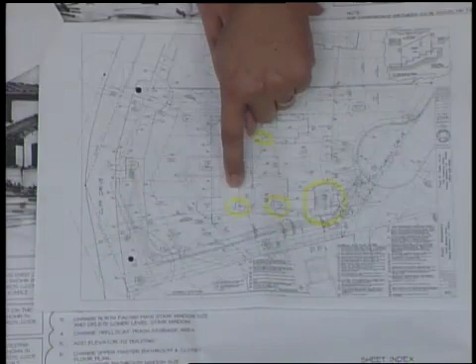The project has been sold to a new person. The person who purchased the house, we're making some changes to customize it for their desires. This is the site plan. The changes: we're changing the trellis at the front, we're adding some skylights, we're adding a fireplace to the back of the building, and we removed a chimney. This is the site plan showing the roof plan.

We met with the neighbors, we discussed them, we did a mock-up out of plywood, and we actually took photographs. This lower area shows the plywood mock-up of the fireplace chimney that's going to be in this deck area. Let me see what this other photo is. Just another side area showing the area in the front where the trellis is going to be changed, modified. And here's another one from the front drive area showing where the garage is going to be located. The changes, moving through.

We deleted one of the windows on the lower level. It was underneath the stair landing configuration. I can show you an elevation, but that's one of the windows we removed. This is the configuration change for the trellis. The trellis before was a little bit smaller, was off-center. This wall, there's no change to the wall except for adding one gate at this location.

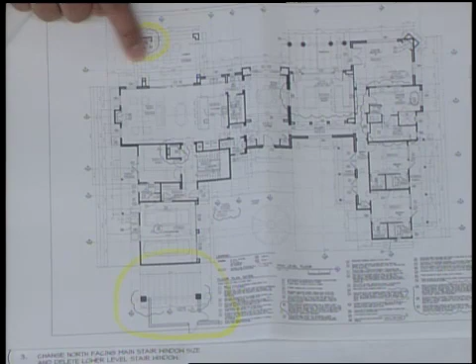Here is the fireplace. It is a wood-burning fireplace on the lower level, and on the upper level it is a ventless fireplace. So on the upper level, all there's going to be is a flue in the back and then this ventless fireplace. On the upper floor, we changed, because we added this elevator, we changed the interior floor plan.

The new owner would like to have a window lined up here in relationship to this area. The window is 18 inches right above the shelf in the master closet. I'll show you an elevation. We moved this window from this area over to here. We changed this window ever so slightly in the shower, and we made this window, we dropped this window, made it slightly larger, and we changed that window in that end.

This is the roof plan once again with the changes that occur in elevation. This is the front elevation showing the change of the trellis at the garage. This is the change that happened for the window. Before we had an arched window. Now this window and the window on the side are completely identical in height.

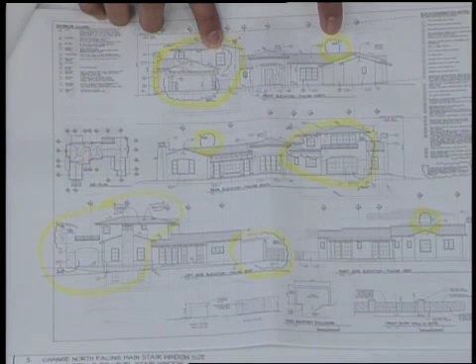I can show you, this is the fireplace that we deleted. These, I told you we made that master shower window slightly different. Here's the chimney. On this end, this is where we added a window. And then this bottom mass increases in width because we had the lower fireplace and then the upper fireplace, and there's one flue and it has a copper cap on the top.

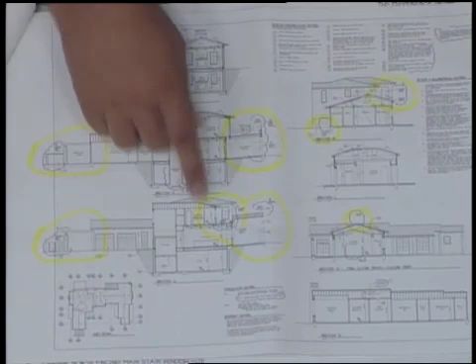This is identical design-wise, just modified the size and the change. No change to the height, just the configuration. More changes here with the chimney, the master shower window, and this fireplace arrangement. More sections going through the different elements. And then the revised window schedule, we actually increased the window area by 26 square feet. So that is the presentation, and that is all the items that are covered.

Anything else? Nope. Okay, does the board have questions? I don't have any questions, Mr. Chair. I just want to feel more comfortable looking at the changes on the elevations on a larger scale.

There also was a letter that was submitted by the adjacent neighbor saying that they reviewed the plans and the changes and they found them to be acceptable. In relationship to... I'm not sure we have that letter. It's in the file. I turned it in when I was at consent. Plus, it was emailed to them. Well, but we haven't seen it, so I guess that was my question. Okay.

So the elevator was accomplished within the existing envelope. Correct. Okay, no questions or comments? I see no major effect of size, bulk, and scale, or exterior changes that are too great, so I can support the project. Same here.

Well, Mr. Lamone, looking for the letter. I just have one question on this fireplace. You're saying the bottom is a wood-burning fireplace? The bottom is a wood-burning fireplace. So how does that fit? It vents right through here.

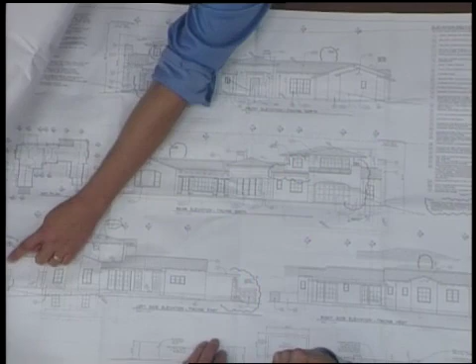So you're at 2 feet and 10 feet and all that with the code? Yep. Okay, so smoke will come out of this thing? Yes. The goal was to keep this in a low profile. I have it at 5 feet. That's a good question. The smoke is 13 feet from this element, which is for the damper element, and then here, this is the 10 foot and 2 feet that you were referring to.

So has that been run by the building department at this point? No, it hasn't, still waiting to. So if that needs to get higher... If it gets higher, hopefully it's not more than 6 inches or so.

Okay, here's the letter. And we do have one letter. Let's see, from John and Sandy. Actually, there's a couple others here. Oh, good, changes. I didn't know about the other ones. Let me make sure the date is 2016 before we read them. Okay, there's one that's August 2014.

This is something about the second design, but it's not. There's no date. And here's one, review after final. This is Schofield and Kaseshian. Correct? Okay.

Property, I mean, let's go over the proposed changes. Okay, so they're the ones closest, on the east of the property. So they're here? That is correct. Okay, thank you. Any other comments or questions?

But what I'd like to show, if you need to see the context photos again, you can look at that. Here is our site plan. We have, again, the grade of La Vista Grande is much higher than the house itself, so you can see from these photos. So the house sits below the road, as you can see from here. These are views taken from across the street at La Vista Grande.

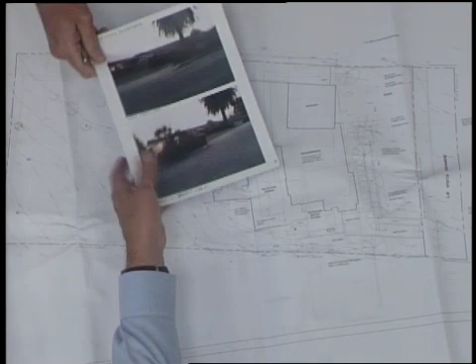So it requires us to drive down into that garage. The garage had to shift to get out of that setback. And in working with the neighbors, predominantly the uphill neighbor who would have been impacted the most, we have reduced our area here and reduced heights. Now, the board didn't ask for this, but this was just in further efforts to try to work with the neighbor. I'd like to show quickly, just visually, how that works.

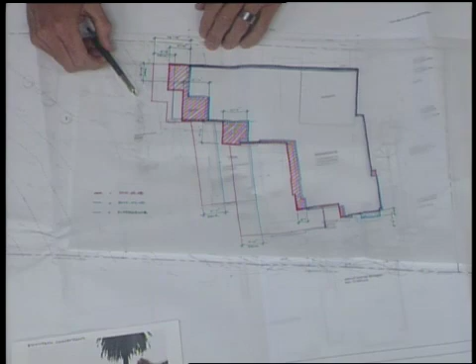But these were all in efforts working with the uphill neighbor. So the green are our differences in number. Our scale structure was 9 feet, overall was 16. And then, it was a minor comment in the board, but we have reduced our deck areas. We've pulled each one back an additional 9 feet. And then these bodies of the house are at 11 feet.

So part of those compromises, pulling it in, quickly where it related to the floor plan, were in this master suite area. We did have an additional bedroom here and stair at the back of this body of the house. We've removed those and put the bedroom on the front of the house, reconfigured stairs. So we've reduced, as part of those compromises, we've pulled in the living room area, we've pulled in the master bedroom area, and that's what's reflected in that overlay drawing.

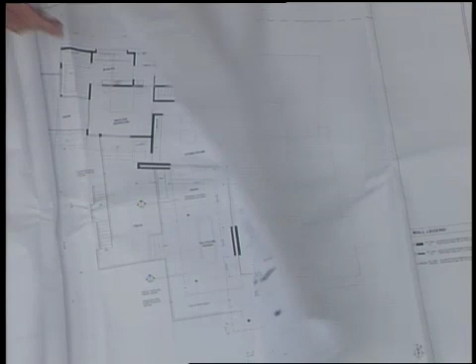So the other thing I'd like to point out, we have basically a walkout basement, so that part is consistent, but we have reduced the area a bit.

Our roof plan, so what we have is a stainless steel metal roof over the body of the house. We have a ballasted roof across the rest. I have those materials to show. One thing about the change in the roof, again, except for pulling things down, this is our higher roof. This roof height, we originally had this overall roof height at 15'6". We've been able, because of the pitch, to reduce it down to 15'3". That puts our lower edge of fascia at 14'4".

Prior, we had it as a flat roof at 15'6". This body of the house came down from 14 feet to 12 feet, and this is La Vista Grande, so this is the part facing the street. We've reduced the height of this body of the house from 13 feet to 11 feet, and then this back edge that was up against the neighbor, again, was further out. We've pulled things in. We had it at 12 feet, and now we're down at 10'10".

We've reduced the overall heights, and again, it's pulled in to help with the view part of that. This roof was 15'6" out further, the additional 9 feet, and that's where we've pulled everything in.

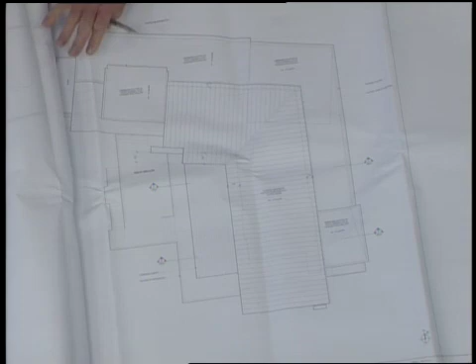But our delta number - we can show on the floor plan better - we're in this area where the canopy came up past the corner edge of the house. Our elevations show that roof area.

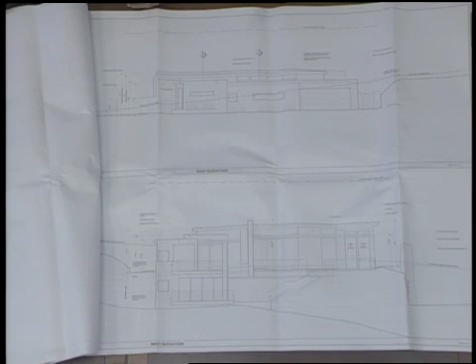So here's our view from La Vista Grande. This dark line is our line of the street, so you can see how the house is nestled into the site. Here's our allowed 30-foot height limit. Just to recap our conversation from before, it's been a while - we were looking at a 2-story house, and that's what was preferred. But in respect of our eastern neighbors, we decided it was better to keep this as a single-story house and extend it down along the site, as opposed to taking it all in the body of the front street elevation.

So here's that extended roof I just mentioned - it keeps this open. Architecturally, I'm doing this because it frames a view out towards the mesa and the edge of the harbor as guests enter the house. Again, we had that before, but it came out to about here, and it was a canopy roof - now we're taking the body of the roof over. So it's an architectural element for framing these views. Again, the garage is pulled in.

This is our view on the west, so our west side. This is that open entry area from the opposite of this. Then we have our canopy roof, sliding glass doors. Here's our master suite and our basement office area below.

So on our north elevation, this was where we worked with a neighbor quite a bit - we did our own story poles with this neighbor in an effort to continue working together and try to reach a compromise. As our compromise, we've pulled this body of the house in, and this edge - this is that master suite behind. But I'd like to show you, since you asked about the sections, how that relates.

This is an enlarged detail to show how that works. Our window area is about 1'8" for the framed rough opening, and on these edges we're using an integral gutter roof, so there won't be a gutter on the La Vista Grande side. We have these details if you need to see more.

So what it starts to look like, or exactly what it looks like - this is the home. As mentioned, to continue working with neighbors, we did story poles with the neighbor to the north. He was part of that process - we allowed him to pick the contractor, and we set these poles so everyone could start to see. Here's our existing home, these are the two poles, and these are our poles at 16 feet.

These are our poles at the back at the heights I mentioned. From that point, we reduced the house, the high point of the roof, down to 15.3, so you can really start to see those two points. You'll see a little extension there - that's just the tape sticking up. Again, the garage had to pull in from where you see here, but because it's lower than the grade of the street, this is how it starts to nestle into that site.

Lane will speak to the landscaping, but we request to kind of soften this front facade further, so we were able to model the trees and bring those in that are on our plan in some of our front landscaping.

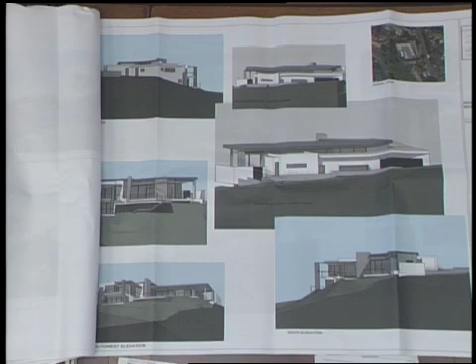So I have brought in an element to ground this end of the house and support that canopy so that the canopy could become thinner and not become a large, bulky item.

I'd like to just show you what we did with those neighbor studies. I have to give the owners credit again for allowing us to go to these efforts to try to work with the neighbors. It's a very nice neighborhood.

You'll hear a lot of comments from people who have a lot of passion for this area. So we had taken a lot of steps to study it, and we knew where we were when we were going into this.

So the owners let me commission an overall topo plan. We did a full topo over the entire area for the immediate neighbors, as you can see. So we did site section studies through this area.

Sorry, I'm covering over your part here. Here's an aerial view of this. This is our site, this is a neighbor to the immediate north. This neighbor has views, and we wanted to study how it could potentially impact him.

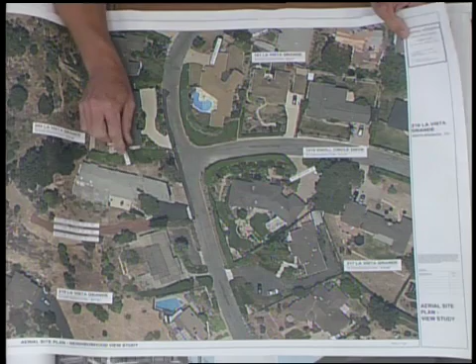And this is our neighbors at 1510 Knoll. So what you're seeing here, I just want to bring these points up: for the neighbor to the north, this is a carport that's accessed off of Vista Grande. This is their home, and this is their outside patio right here.

This home has a master bathroom deck off the bathroom at this corner, and a living area in this part of the house. So I'm just bringing that up so it'll make sense with the photos.

So that immediate neighbor to the north, we were able to do sections through the entire site and really start to study their building pad elevation versus ours, our roof heights.

This represents our reductions from when we were here before. So these are the heights we've pulled down in our compromising. What we did was do a story pole plan with him to understand where we're going. That's just what you saw in that photo.

So again, he's here on the north side of the site. So we outlined all these points, which are so much lower than here.

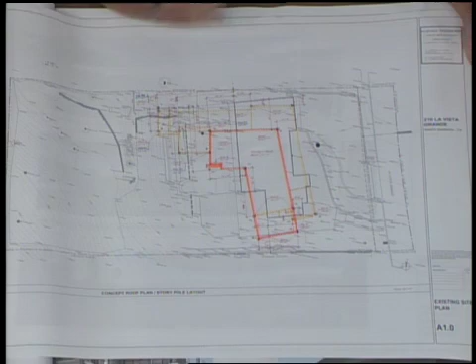So we did the profile that would affect our neighbors at 1510, just to the north. So we outlined these points. Those are our 16-foot that you saw on that photo.

These were at 13, and we were at our 11.6. We reduced those from 11.6 to 10.10. Went from 13 to 12.10. These are the numbers in blue, the points you see on that photo.

So what that looks like from his vantage point. So this—I'm sorry, I'll start here. This is my standing view from outside their dining room. So here are our story poles.

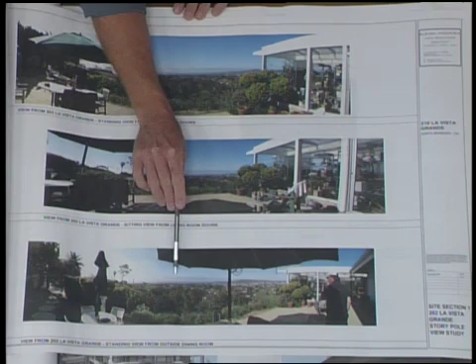Here's our high point across there. This view is taken just outside of his living room. So again, our high point here, and then the edge.

This is the same view sitting—I'm sorry, standing. This was sitting, this was standing. So prior we were out, up to 16 feet further out, 9 feet for the structure out here. So this is where we were making the compromises to pull in, and our story poles are showing that.

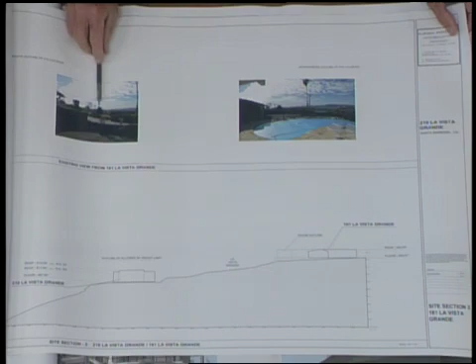Our highest neighbor, we could—this is up and across La Vista Grande. We did those studies prior, and here's that palm tree, and you can see there's our house. We're so far under that, we didn't affect his.

We were lower than where we were with that original photo. So here's our neighbors at 1510 Knoll Circle. This is their home, and this is the existing hedge that you see in the photos, and it shows on the context photos that we have. Here's our project, and again, our reductions from where we were. Now, the board didn't ask for those reductions, but we've made those in the effort of compromise with the neighbors.

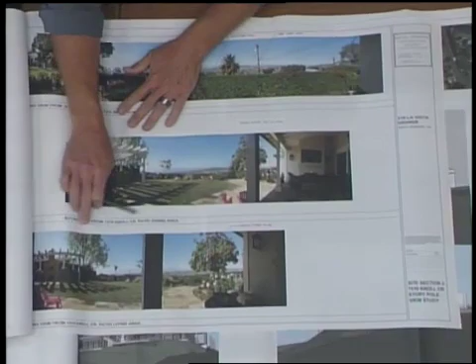This is from the patio area of the neighbor, and they were gracious enough to work with us on this and let us study it from their house. This is the edge of that south story pole. This is our highest point, and the rest of the house is back. There's that palm tree for reference.

From a sitting view from the dining room area, and here's the living room, no poles are in view. I couldn't identify any through here. Standing view from that point, this is that high point of the south story pole. Here are our west story poles.

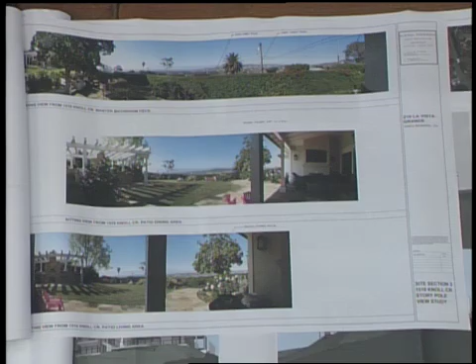So we feel that our efforts have helped, provided a project for the neighborhood, and we didn't go two stories. That was where we would have liked to gone because the views are so nice. But we understand the sensitivity here. So we're keeping that as a single story, and that's what these reflect.

And just want to review a few other items real quick. We did look at lowering the overall grade, to try and look at every option we can. We did study lowering the grade. When we started working out how, the house is lower than the street elevation as you come down.

It put us, if we lowered it one foot, it put the driveway above our recommended 10%. We were almost 12% grade to make that one foot change. It's already tight enough for a car to bottom out. We have to be careful the car doesn't bottom out as it comes up the driveway and out of Vista Grande. And we can't raise the grade because we're working to lower it. So I just wanted to let you know that we did study that as an option as well.

And the question was about colors. Since the house, what we're looking to do is have a standing seam metal roof. It has to be mechanically seamed because of such a low pitch. But we're looking at a sample like this one. And then the ballasted part of the roof would be our Santa Barbara Gold, so it'd be like the crushed rock on top so that we don't have the membrane shown.

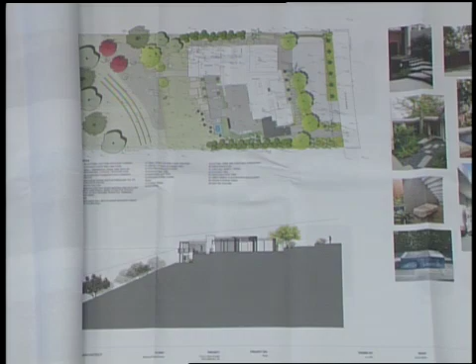Thank you. Anything else?

If I may, there were already a lot of references to the massing of the project. Okay, we're going to get into all of that. We're sorry, we're going to let the board have the questions now, but just to clarify...

On the driveway, so you've moved the curb cut opening down. That allowed you to get this lower because it's going downhill, correct? And your grading effort is to get this point as low as you can in terms of getting this to be 10% or less from here to there, correct? Correct. Okay, so if you move that curb cut anywhere else, if you moved it further up, then the slope drops dramatically and you have a bigger challenge to get to 10% to get this lower, correct?

Correct. Okay, what's the scale on this thing, 1/8 of an inch? You had the possibility to move it - let's see, you have a 10-foot setback as I understand it - so you could have moved it another 6 feet to the south, but based on your numbers here, that isn't going to get this to drop much further, maybe another 6 inches at most. That's correct. And then our walkway becomes the driveway, which we try to avoid. Okay, so you've moved it as far as you can to get the slope to work. If you had your garage over here, it wouldn't work because you'd have to be higher, correct?

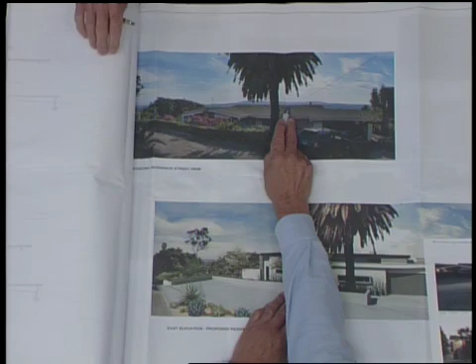Let's see, I want to go to that photograph. Here it is. And you had actually a bigger photograph of that. That's right, okay. So the ridge height currently for this existing roof, you know what that is? That point right there? Yes, sir.

We had it measured. 508.92. Should have brought a calculator. 508.92. What is your finished floor existing? 497.5. I'm sorry, 497.05, 05, not 0.5. Okay, so 497 finished floor now, and the top of that ridge is 508.

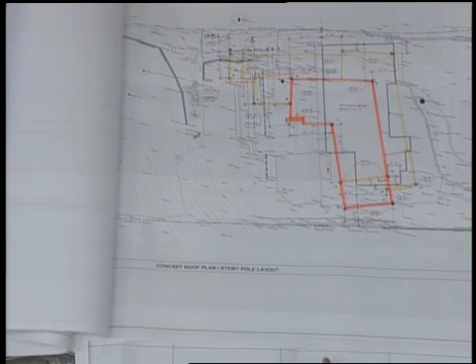So who has a calculator real quick? Brian, you got one there? Yeah, so it's 508.92 minus 497.05 - Chair, I'm sorry, that was the lower part of that ridge, the high ridge is 509.11. 509.11 minus 497.05 equals 12 feet. Okay, so the current house is roughly 12 feet high from where its finished floor is today.

Okay, so your new roof ridge line height, the one you've shown on this section over here, that point right there, what is that? 15 feet 3 inches. So 15 foot 3 or 3 inches? 15'3". So you're roughly 3 feet higher. Okay, and you're well below the 17 feet 6 inches that's required for a single-family home anywhere else in the city. That's what we're allowed.

30 feet - well, you're allowed 30 feet, but for design review, yes. For design review, anywhere else in the city, a single-story house can go up to 17 feet 6 inches without anybody looking at it. Okay, so I just want to make sure everyone clearly understands, so we've got a roof height that's 3 feet more than it is today. Is that what you're telling me?

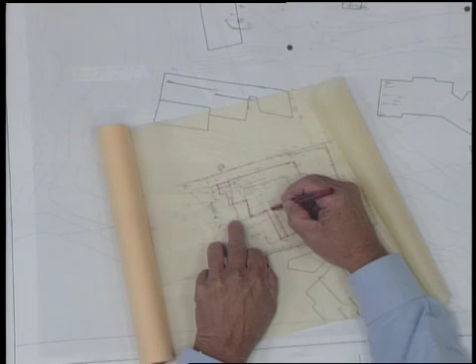Okay, so we're roughly talking about a footprint that's that big for a single-story house. Now I'm going to compare that to that single-story house across the way. That's the garage, carport? Carport. That's a deck, or is that part of the house? This is an enclosed area, that's part of the house. It's like a large trellis piece of the house. But let's just assume the house is this big.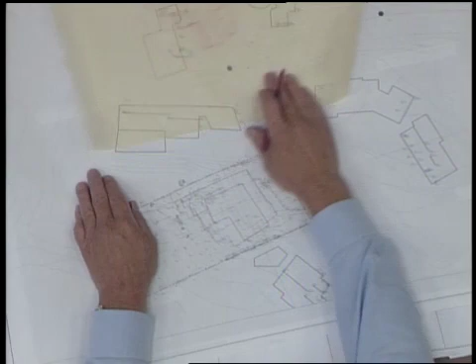Okay, so that's compared to that house, compared to that house, compared to this house.

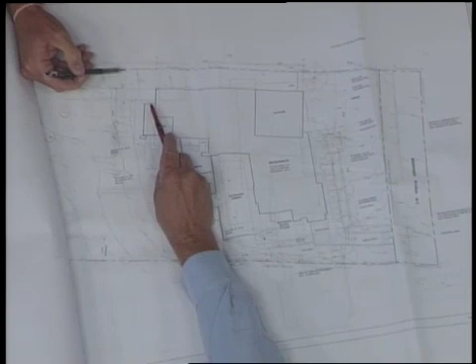And the deck distance on this side, let's go back to your new drawings. You're now greater than the 15 feet that we require as a guideline, so you're at 17.3 over there.

Okay. And on the walls that you're talking about, you had mentioned walls over here and over there. You said they may be in bad shape. I wasn't able to actually walk onto the site, my views are only taken from what I can see walking along the street, so I really couldn't see those walls. What are they made of?

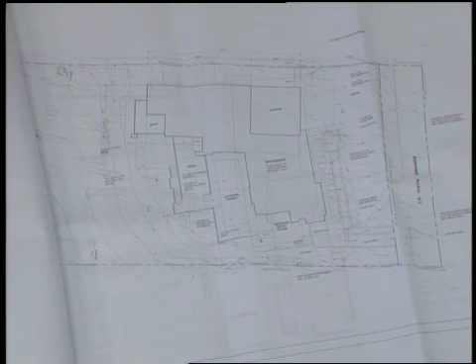So where we say the area of wall to be replaced on the site plan, there's a full stone retaining wall. It steps back. There was a concrete post with concrete infill panel, those built-in 4-inch panels. That's what you're seeing on this part of the survey plan. This is what we need to replace because this portion is just showing buckling. So what would you intend to replace it with?

What we're looking to do is a full retaining wall for this portion that would be either block or concrete that would be faced with stucco or brick or whatever. Stucco stone could be a potential.

And do you have the same condition on that side? No, sir, this one, we're looking to push this retaining wall over, but this wall's existing.

Okay, and then I want to go back and look at your elevations very quickly, so I understand what you're doing with the front entry there. And here I see a column, would I actually see that column looking through there? Would there actually be a column? That's it right there. Okay, so it's on the skew. Exactly. Okay, this drawing is squared. Right, okay, so because it's squared to your front elevation, and then where you were talking about the clerestory above the kitchen and dining.

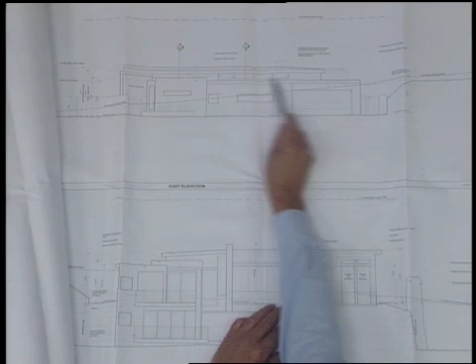So kitchen is here and dining's there. Dining is here. Oh, here. Kitchen is this. So this is the only high window you have facing, because I think previously you had windows all the way along here. That's right, we've reduced the area of those windows.

Okay, now this was the La Vista Grande side. Right, that's towards the street. Okay, and then over here, where's the floor line? This is the master bedroom. So this floor level here, basically like that. Okay, so that's kind of the floor line there.

Okay, so that's here, so if I have a 6-foot person, okay, and that's a 6-foot person, okay, so the way I read this, the way you've drawn, is this above the bed, the headboard? This is a bathroom, the master suite bathroom. Oh okay, I'm sorry, so this is above the vanity. The lavs are here. The lavs are below that? We're not looking for that to be clear glass.

And what are you thinking that'll be? Frosted, because we want privacy, we just want the daylight. And this one is in the closet? No, this is the laundry room. That's the laundry, okay?

And then I guess my final question, you showed us colors of the roof, but in general, what are you thinking about the colors of the house?

So the colors of the house, we're looking at an off-white, much like it's rendered here. There was a comment that she didn't want white in the house, but because the predominant view is down on this house, the east side's not getting a reflective quality off the sun, so we feel it's still appropriate to keep it as a white, off-white color on the face.

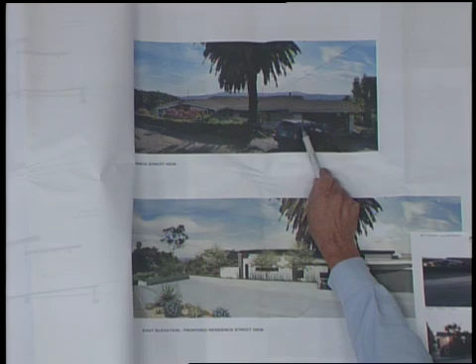Okay. Let's see. Do we have other questions? No. Okay, before we go to comments, I want to address the issue of story poles.

You chose to go out and do your own story poles, correct? With the neighbor, correct. And you chose to because you were concerned about the neighbor, but apparently the rest of the neighbors didn't know that. Well, they did, and it was addressed in the owner's letter.

So here is the challenge with story poles. This board has the purview to request story poles, and we can request them at three different levels. A full level is typically required on a new site where there's no building at all, because it requires the grade level, story pole, and so forth—it's a much more complicated process. We also have a standard level that gets a bit more detailed, and a basic level that just gets to the heights of those things.

But when we ask for those, they're to be put up in a certain time frame and remain there for a certain period so the neighbors are able to look at it. So under our purview, there's a process you go through. You chose as a private owner and designer to do it on your own, so there was no review or oversight by this board or city staff. I want to make sure people understand that—it was done by the owner and the architect working with their adjacent neighbor, not under the purview of this board. If it were, we have certain requirements and regulations.

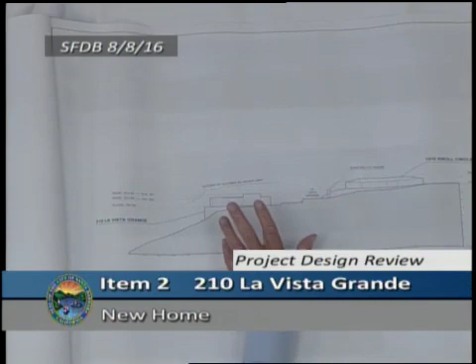One of the things that we did ask for is this study through sections, and thank you for doing that, because it really does help us understand where this house sits in relationship to the other houses. That's why I was asking about the finished floors and the roof heights, and we're only really talking about a 3-foot differential.

If you had another—where did those little computer-generated perspectives go? Oh, they're on the main plan. Oh, they're on this side. Okay, yeah.

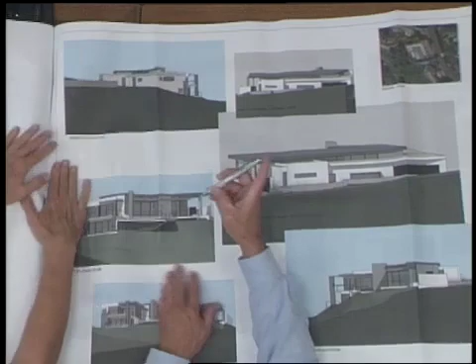So I want to talk about size, scale, and bulk. One of the things we talk about when we talk about scale, I would encourage you when you do these sketches to include people, because that's a 6-foot high person compared to where you are.

This being, I think you said 15 feet to here. So if that's 6, another 9 from here to here, and you're looking at it in perspective. That's what we talk about when we deal with scale. Scale is in relationship to the human person, and we look at that very carefully.

So when someone looks at this without people there, they can conjure up all kinds of images of commercial buildings you may have seen that look much bigger. You can think about banks and schools and some other buildings. So that's what we talk about with scale.

When we talk about bulk, we talk about that form right there. And is that form different than some of the adjoining homes? That's where I start to look at the footprint. That's why I did that little exercise a few minutes ago on this piece of tracing paper. Does the bulk of the house start to get bigger than the adjacent neighbors?

So when we talk about size, scale, and bulk, that's what we're dealing with. When we talk about size, that's where we get into the issue of the FAR. That's why the city council, when they had this board come into play, gave us the tool of using the FAR. Our guidelines really have us look at things that preferably are always below 85%.

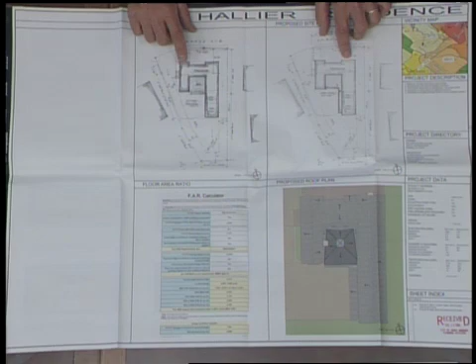And here's the roof plan. This is the street side of the house, so all of the additional space is behind the house, and the grade drops behind the house. So this is a two-story addition, but from the street there's very little difference. I've now added for the staff an existing and proposed plan. The cross-hatched areas here are the infills. So it's a two-story addition in the center of the courtyard, and then a small addition to give the garage some depth. That's a one-story addition.

And the elevations, I've done 4 elevations more accurately, partly in order to understand the definition of cellar and the grade on the exterior. This is the main section through the building. Here's the other section that you asked for, and I'm sorry I didn't supply it with these drawings. The only change from the street is this little piece of skylight which shows over the house, and I'm changing that from a window to a door. So essentially, that's what you see from the street now, and that's what you'll see afterwards.

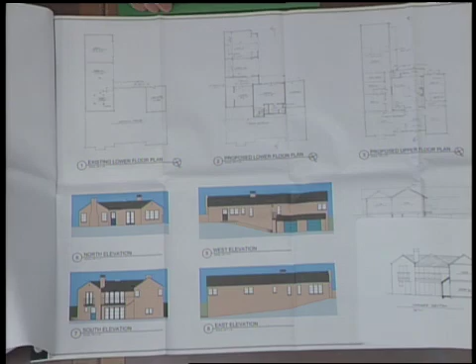Okay, and I think that is everything you asked for. Okay, and you had the roof plan on the other sheet. Right. Okay.

Before we go to public comment, Mr. Lamone, is there any staff comment? Just want to clarify. So you say that it qualifies as a cellar, and therefore half of that square footage does not count toward the 50% rule now? Right. I did a whole exhibit for Caitlin on that.

Okay. Is there anyone in the public wishing to address this project? Mr. Lamone, did we get any communication? Doesn't look like it. Okay. Then the chair will close public comment and bring it back to the board for questions.

Do we have questions? It's just plaster siding, right? Yes. Just it will match. All the materials will match. And the existing garage doors are just panel doors? There's a photo of them there. We're going to try to reuse them. They are painted the same blue as the garage doors open. Oh, are they? Yeah, sorry, they are painted the blue that matches the lower doors in the picture. And they are paneled. I think they might have a top row of glass. I'm not sure. Any other questions? No? Okay, let's go to comments.

I'm assuming you're requesting project design approval. Correct. Can I see the minutes again? Sorry. Yes, right here. Thank you. Okay, comments?

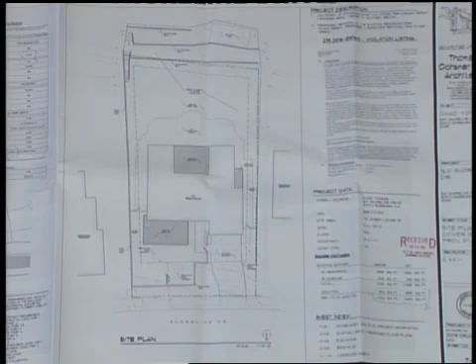Yes, so just clarification off the top, the project description is slightly increased. The size of the addition is 853 versus 591, and the FAR goes to 65% instead of 60. Can I clarify why that happened? It was partially an error by the plans when they were originally submitted, and the floor plan basically accounted for that, but when I reviewed it this morning, I noticed that the square footages were wrong. I submitted these plans with a blue form this morning.

I wasn't aware of that, but okay. We don't notice projects and then change the size of the project. Oh, okay, that's sort of a switch.

Yeah, it was the same project, really the same project, but the numbers were not correct. That's a big problem. We don't notice projects that have wrong numbers. So I'm just going to caution the board that they have the choice to either renotice it or give you some preliminary direction, because I don't like to have a project that doesn't convey the accurate project.

Let me ask you one other question. Because this is here for comments only, it has to go to the Planning Commission, probably because of a development permit on a bluff. So today we can't do anything more than give it comments.

When it returns, does it get noticed again? No, not typically, but I would recommend we do that. So part of our motion could be renoticing, correct? And to limit the direction today, because it's unfair without a proper notice to give comments on direction to change the project, unless you reduce the size to what was noticed.

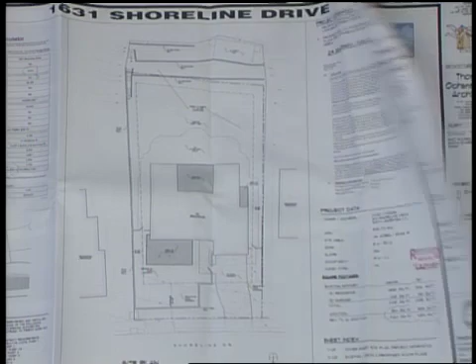So the existing house is a bit unfortunate. It's really odd. It's got a 10'8" plate with a 3 and 12 pitch, and the windows are at 6'8", and it's just a box. So it's really a challenge to do something with it without completely taking it down.

So the concept is to really try to create some new roof forms and extend the roof down with some eyebrows around the perimeter. Have you done any mold abatement for the building? Have they talked about it? It just kind of looks like there's something going on. Yeah, let's wait till we get the questions. Sorry, there's a lot going on.

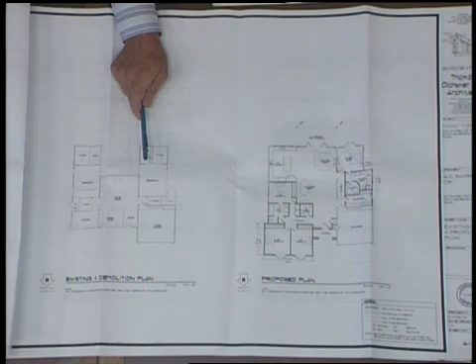So we're really going to go through and reorganize the whole interior, new windows, and it's basically going to be gutted. This is the demolition plan, which we've established maintaining the perimeter footprint and keeping the existing roof structure. There's a 10'8" ceiling throughout, so we've got some nice volume. The challenge becomes, what do you do to turn it into something that improves on it?

So the proposed floor plan extends 2 bedrooms out off the front side, and it encloses that interior space and turns it into a living room, and really reorganizes the floor plan and puts a master bedroom on that southwest side.

So in terms of the forms, we've got the existing elevations here on the left side, and as you can see, there's a 3 and 12 pitch roof. The concept was to find an architectural style that we could extend the roof eaves forward and bring it down to a human scale. What we did was kept the ridge - I've got a roof plan that shows we kept the ridge across the center portion of the structure - and added some higher pitched gables, as well as reframed the garage low pitch, actually reframed that to a steeper pitched gable, and then extended the eaves down with a heavy timber feel that allows us to get them projected out beyond the existing facade.

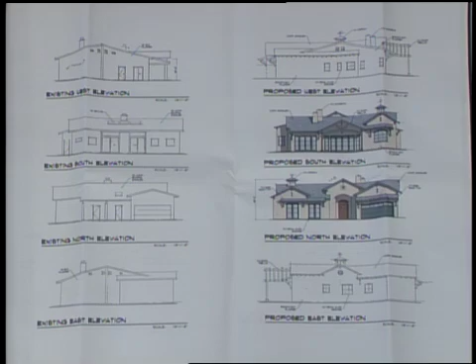Good fix. So the roof plan on the next page kind of gives better clarification on the concept.

So the ridge would stay the same. There's actually these skylights on the south side which would stay, but basically the plate throughout the entire roof would stay. It's actually 12-inch ceiling joists that just run all the way across, so the top of those would actually be up around 11 and change.

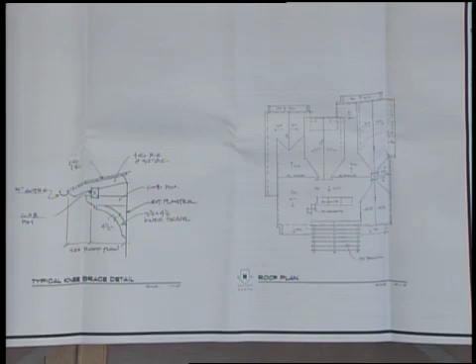But so the idea was to add an entry gable, reframe the garage gable, and then a gable over the bedrooms. And on the back side, keep the pitch and turn it into an eyebrow, and then add a small gable over the kitchen. This would be an early sketch of what the detailing would be in terms of the heavy timber and the eyebrows that would help bring down that roof extension around the perimeter of the building. So with that, Chuck, you want to get into your...

You can stay there, it's okay. Speak into the microphone because it's being recorded.

Some of the exterior zoning violations were these retaining walls in the back that were never permitted. Adam Simmons, a hydrologist and geologist who's advised us on the concept, finds these walls to be in very nice shape. It's a 6-inch concrete caisson that goes down into very solid material, and these walls are not angling, sloping, or failing even 1%. He thinks they're very viable and solid, and recommends they stay in place because keeping them would add to the stability of the bluff.

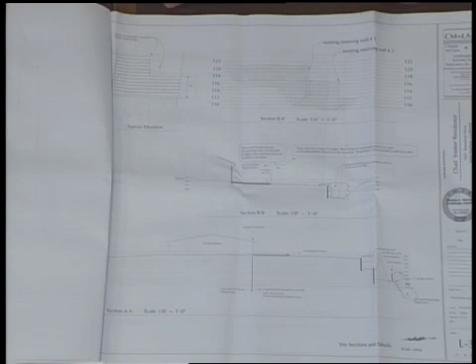There are also 3 drains that currently exist on the property that take water from this lower terrace down to the beach, and he's recommended that we remove those. He's also recommended we remove this concrete pad, and then all of the water that hits the roof is directed out to the front and treated per the stormwater program. Any water that lands in the back is allowed to soak in, and then migrate down and sheet flow over the bluff. No more concentrated flows.

Out front, there's an existing double entrance driveway, and we're going to remove one of those so it'll just be a traditional driveway in. There's a nice horizontal hardwood fence that's going to be installed on both sides, and that'll also come across the front to give a little bit of privacy. We're removing one bad tree out front that's in the 20-foot setback, so we've got an application in with the arborist on that.

There's a detail of the fence that you'll see from the front, so it's 1 by 6 boards horizontal. And then we go on to irrigate it and plant it. A couple of new trees out front, and the rest is existing landscape to remain.

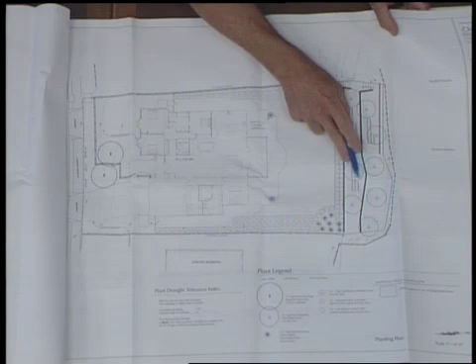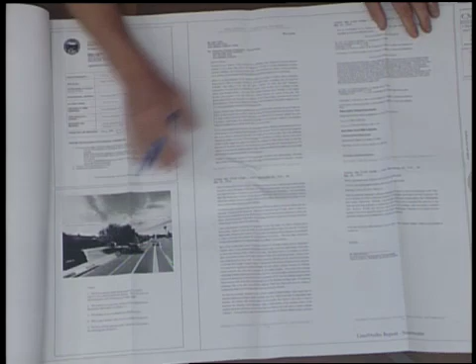We've got some lemonade berry that's going to fill in these terraces to pin those terraces down. We have actual permeable paving to absorb the stormwater. This is our tree removal application, and this is Adam Simmons' geologic report. And then we have the survey.

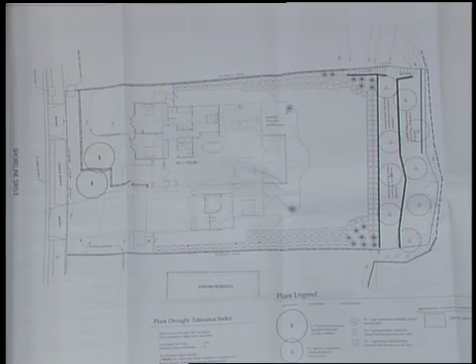Okay, let's see. I think that was my questions. Other questions? Yes, for Chuck too.

So in front of that fence, you are planting some plantings back in front of there, and the driveway cut - is that just staying, or are you going to remove the sidewalk?

Okay, yeah, we'll come back with the revised front landscape. Other questions? Yeah, one more.

And so I see this line here that looks like a patio edge. Then what's in here? That's a piece of drought-tolerant lawn. Oh, I see, okay, I didn't see a hatch. It's that verde - oh, buffalo grass. The owner's keen on that.

We're, so I was just curious, since you're on the bluff, there's usually a line that shows the... Oh, that's right, the 75 setback, and 50. You're right, yeah. Your office mentioned that to me, and so far it's not on the plan. We'll get it on there.

Because I don't know, wherever that is, you're probably not going to be able to add a lot of water up here to the top of that bluff to keep that buffalo grass alive. That's an awful lot of buffalo grass. Adam Simmons said that everything else you're proposing, he's with, and he's kind of the guru, it would seem. Okay, so I'm not sure how to respond to that. He didn't have a reaction to the lawn amount.

Okay, other questions? Okay, let's go to comments. Yeah, Mr. Chair, I only have one comment.

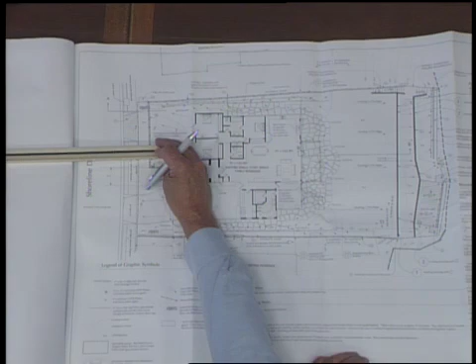Part of the problem we have along Shoreline Drive is everybody wants to be Montecito, and they all want to have big hedges or big fences right on the front, and I just don't think that behooves the neighborhood correctly. I think under the rules, you can get this back 10 feet, and then you are outside of that 42-inch restriction, I think. So that's only another 4 feet. So that's something you might explore.

The other thing is the disconnect - and I know everybody's doing them because I see them all over the place - is the horizontal boards on the fence. And that kind of connotes to me a very contemporary approach to the design, and it doesn't, in my view, jive with what is being shown on this sketch. So I think a fence design that's more compatible with the design approach of the architecture is probably going to be a little bit more palatable.

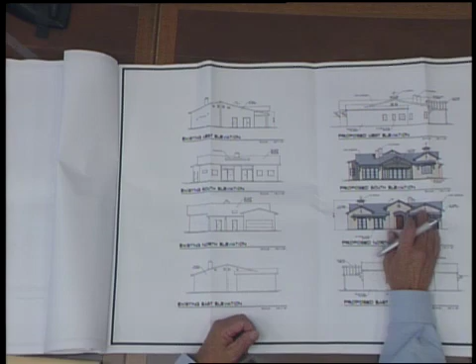I agree, just to interrupt, I was working on this for the owner, and then Tom got involved. I understand how it goes. So I'm just saying you need to kind of get that coordinated. And then I, as my landscape colleagues will all be interested to see how you're really going to landscape the front and what's going to happen there now, because I think landscaping will also help your architectural scaling issue.

What goes in front of this house and where it sits in relationship to the face of the house, and how you set that up as the landscaping leaves, the composition of landscaping as it leaves from the curb back to the face of the house. I think it would be important for you to really understand what's happening on each side, the homes on each side, in terms of landscaping. Because on that portion of Shoreline Drive, it's a very wide boulevard, and that goes to your backing out issue for automobiles, but it also presents a different scale on Shoreline Drive than further down when the road narrows. So paying attention to that landscape composition is probably pretty important, maybe even more important than the architectural approach.

So that's my overall comments. Any other comments? Yes.

I have some. I'd be in agreement with the chair of the board about taking this fence back. It's just way too close to the sidewalk to be that high, and the change in style would also be really good. And I'm going to be curious to see, are these doors coming out the front there? So what's your paving going to look like? That all needs to get tightened up. And the plantings and placement of trees is going to be really critical in front of this house, and species too.

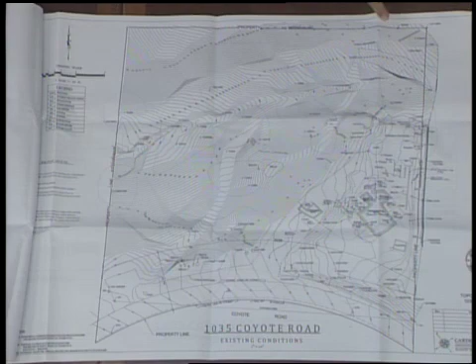But to bring it up to conformity, we meet the parking requirements - we're having to add a two-car carport. Because of the constraints of the topography of the property, you can see the flat area - it's 0.6 of an acre, so it's a very small area of a building pad for the home and also the carport. On the first page, the site plan, you can see where we're proposing to put the carport.

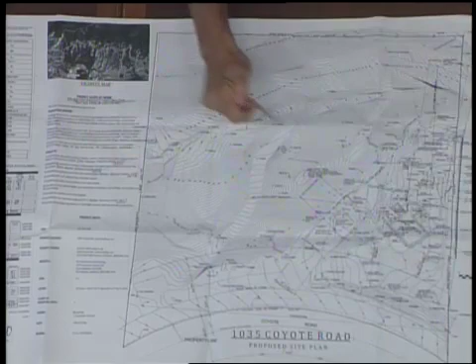We're going to actually remove the accessory building and place the carport in pretty much the same location that the accessory building is, and convert the workshop into a residence.

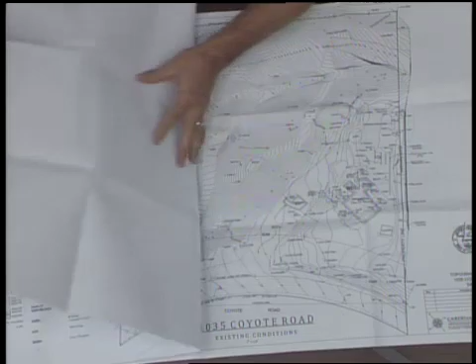Wow. Do you have elevations? We're not changing anything on the existing residence - it's got a very whimsical Hobbit house feel, which we like, so we're going to keep that as is. As you can see, it's got a little kitchenette in it and a bathroom.

So we're hoping it's not going to be - we're going to be dealing with some building department issues, converted to residence. But, so just to be clear,

So basically, from where you are today, you're not adding any other square footage? No. Okay, anything else that you want to share with us?

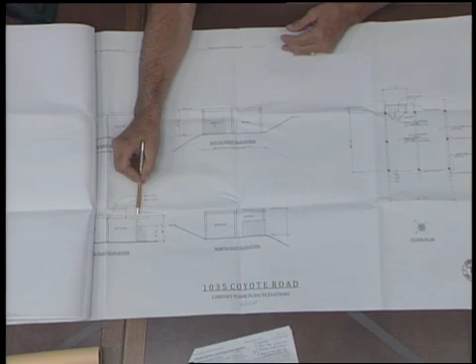Well, the carport - we don't have to do it, but to meet the parking requirements. I'm trying to minimize the structure. I'd like to not even see it from the street, so that's the reason for the flat roof, which the residence also has, so we're mimicking the flat roof of the house and adding a few details. This outrigger detail is a reflection of what they have on the house too. I'm sloping the roof away from the street so you won't see the flat roof from the street, and I'd also like to see vines grow on these columns and eventually cover the whole structure to make it just go away.

Okay. Anything else? That's it. Okay, all right.

Staff, do they need to know anything at this point? No. Okay, what I would like to mention, I noticed that there's no action here. We've been through a full DART process, staff's thoroughly reviewed this project, so I'm just wondering why we're not having action today.

Well, because you have to get a modification. As I understand it, you've got to go in front of the staff hearing officer for modification. Can you elaborate, Mr. Lamone? That's correct - you cannot get an approval. All you can get is positive comments that would help you in achieving modification approval. Okay.

So I want to come back to that in a moment, but is there anyone in the public wishing to address this project? Mr. Lamone, did we get any public comment? No, we did not on this project. The chair will then close public comment and bring it back to questions.

I want to go to questions first, just to clarify. The project description talks about the fact that, the way I read this, the existing footprint of one of these structures sits within the 35-foot setback. So could you clarify that? You can see the setback here. Okay, so this is the setback line. That's right, and this is the right-of-way line. Okay, so that's the road right-of-way, and that's the 35.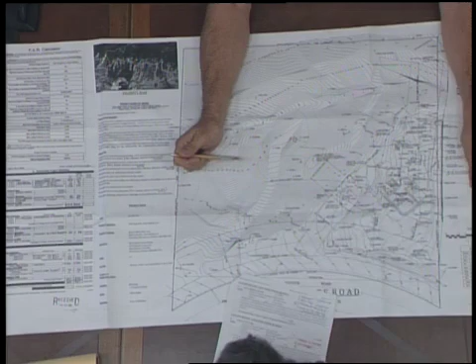Typically what you're looking for is positive comments from this board before you might wish to appear before the staff hearing officer, because the staff hearing officer will take our comments under consideration when they determine whether or not they're going to allow these to remain or be built in that setback line, for the modification. The hearing officer could say no, I'm not in agreement, you can't keep it there or build it there. So he's waiting for our comments, that's kind of the process here.

Once you're done with that, then you have to return to us. After you've gotten a decision from the staff hearing officer, then you'll have to return to us for our formal action. There's two things you're going to receive: you're going to get project design approval, which is basically approving the preliminary concept design, and then final design when you finish working drawings. Now, given what you're showing me, you might be able to achieve that all in one meeting, but that means you'd have to have complete working drawings done, so the carport would have to be engineered. And you'd have to gamble that we're going to be in favor of the project as it's initially designed. So that's a gamble on your part.

So let's go to comments. Questions still? So I see, this is Adobe and brick, it looks like to me. Yes, there's Adobe and brick.

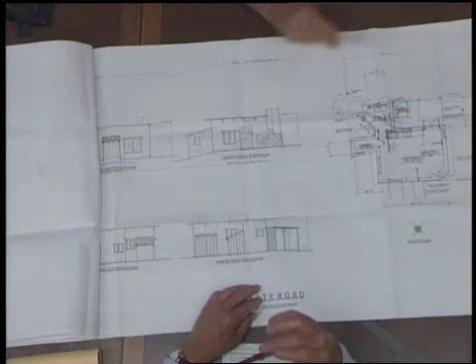Other questions? I was up looking at the house from the road, and I can tell you that fireplace doesn't look like that. It's cantilevered at this end, so just a little bit right there. I know what you're talking about. You need to make sure your drawings reflect what's out there, particularly as reference to Ms. Woolery's question about that. I show here on plan, that little piece cantilevers out over the chimney. And then on the carport...

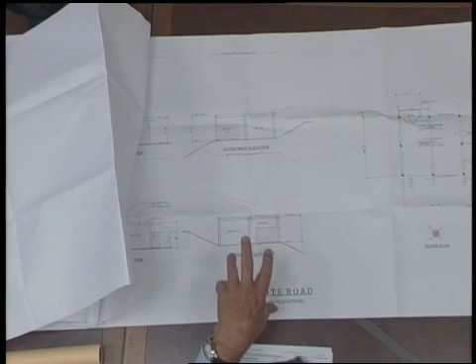You talked about having a flat roof and material, so what's the material you're thinking about for the roof? Oh, it'd be just a flat built-up roof. Did it have a gravel top or just flat? Gravel top. So a gravel top of some color of some sort? Yeah, and I'm sloping it away from the street so you won't see it, and the idea is the vines. Okay, and then the general color? Colors, I haven't thought about that yet. One of the things you'll need to have is a complete color board when you come back. Okay, other questions? The intent would be to match the house color.

One other question I have is, you talked about planting some vines. Where are we at? Side plan, yeah, some vines here at some point on some of these posts. Are you doing any other landscaping? No, basically it's going to pretty much be as is, natural. There is a fence out here now, so that's going to remain.

All fences are being removed. So the fences are going away. This wall is staying, obviously, but all the fencing, all these railroad ties, there's a structure against this wall that's being removed. A lot of the existing things are being removed. Okay, and the oak trees, there's oak trees all over the place. They're all staying where they are? Yes. Okay, all right, other questions?

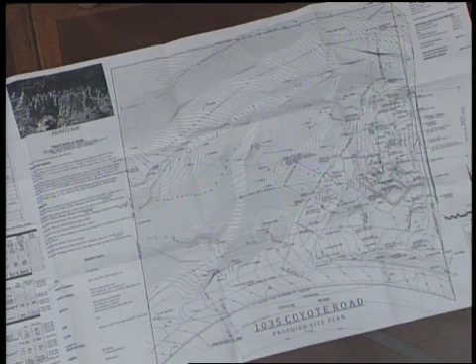No bedrooms? No. There's a little loft above that big room that people have been using as a bed. See the loft outlined right here? And there's a ladder you climb up to get up, so the bed's up there. I see, okay.

You need to purchase, there's two new books at the bookstore, Living Small, Living Little Houses, quite delightful little books.

It's actually very charming inside, it's got a lot of character. The roof structure is existing. Yeah.

And what's the material on the roof now? It's flat gravel. And what color is the gravel? Do you recall? I don't recall.

Now, is this seen from the neighbors? Can they see it? From the street, you can see a little bit of it, not much. If you've been up there, you can see the structure from the street, but you kind of have to stop, get out, and walk over there.

All right, let's go to comments. This is here for comments only, and if he'd like to proceed to the staff hearing officer, he's going to be looking for positive comments. I guess my comment is the size, bulk, and scale is so small. The house is so unorthodox. As long as it passes code, I guess. There's not much I could say.

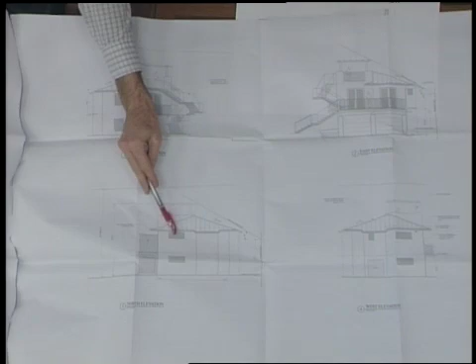From the beginning, we've been concerned about privacy for everybody. The windows on the north elevation are up high—higher than anyone could look out. They're just for light. And the existing hedge along the property line makes it so that the people in the house next door couldn't even see the building.

We'd like 12 feet—that seemed like the sweet spot for the hedge. Without administrative approval, it's limited to 8 feet, but with administrative approval, it can go up to 14 feet. But 12 seemed like an optimal height because that maximizes the amount of light the neighbors can get without either neighbor being able to see each other.

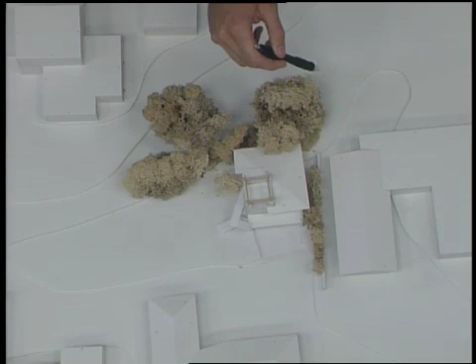So we thought it was important to emphasize that there's already a very mature grove of trees in this area, to also show the relationship of this smaller house. Forgive us, these are kind of massing models—they're not all flat-top houses, but to show the size, this is a little bit smaller than most of the surrounding neighbors. There is a two-story in the vicinity as well, and one across the street, too.

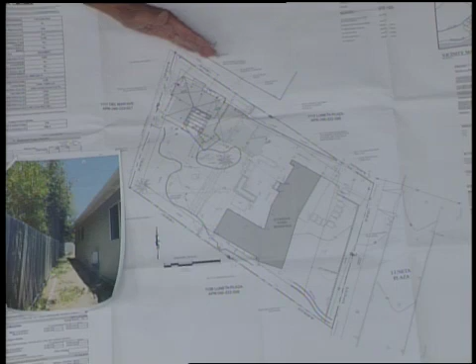However, the light comes into our house from this direction. So if there's a second story here, we won't be able to get the daylight that we currently get through the bamboo hedge. It doesn't screen out all the light.

But with the second story this close to our house, there are actually on this—I've shown the location of our windows. Here's the second story proposed window. Here are our windows.

This structure will screen out a lot of the open sky that we currently see from these two windows. So if the second story could be moved away from the property line, we would really have no objection to the project. We just think that second story is too close. Now, I don't know if that involves moving the whole structure away from the property line or simply stepping the second story back.

Also, the fact that this second story window has a clear view into these two windows, our sense of privacy is reduced by having that second story window. And they could lose the second story window. I don't think—I looked at the plans, they have windows on the other three sides. I don't think that would really impact the light in the house, especially considering that's on the north side of the house.

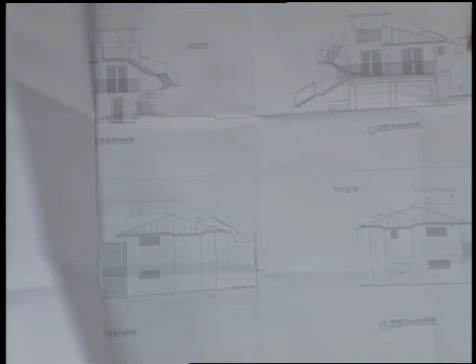I want to just clarify. So did you do the solar? You had a... Yes. I thought you had a solar ordinance. It complies with the solar ordinance. Here shown. Okay, so the city solar ordinance requirement is that line right there?

And 12 feet up, just so I'm clear, on the footprint of this building, is this right here? So this is the roof line? Yes. Okay, so the closest point is still beyond the 6-foot setback?

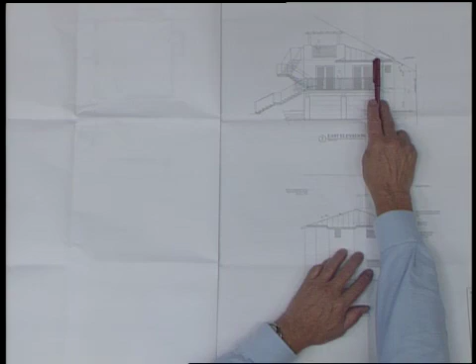Okay, and your floor-to-floor heights are—I'm trying to read here—9 feet? 9 feet, 8, 10, and a 4 and 12 pitch. Okay, to match the house, and we're dug down 2 feet into the grade. Okay, all right, let's go to the board for questions. Who has questions? I don't have any questions at this time.

Questions? Lisa? No, not now. I have a question. Yes. So if the solar access line is fairly meaningless if there's a bamboo hedge that's 25 feet tall, however, right?

They're going to get more light after this is trimmed down than they had before. So you're intending to trim the bamboo down? Yes. Well, that doesn't trim very well. That's one of the ugliest things one can do to bamboo.

That was my question to my landscape colleagues—is bamboo the appropriate hedge? No, it's not, because you can't really trim it like a hedge. I mean, it's just contrary to its whole growth pattern. It will look absolutely horrible. The whole idea is that it has that laciness, and you'll have to continue to do that, trim it constantly. Not to mention it'll keep spreading at the base.

How big is that hedge? Does it go for a long ways, all the way down the property line? No. Well, so what it's showing—do you have a drawing? Is that it right there? It's from here to here, roughly. Yeah, okay, wow.

Mr. Chair, as you're well aware, there could be an agreement between the two neighbors to allow it at 14 feet, I believe—8 plus 6. So my question to you is, when we went through this whole hedge ordinance issue, it seemed to me there was some discussion as it was moved through city council review, et cetera, about the use of bamboo. Can you recall what that discussion was? Yeah, there was some debate about whether it should be allowed at all, and I think there was a preference not to use it because of the problem of it growing. So bamboo was, even in that process when we adopted the new hedge height ordinance, not recommended as a preferred specimen for hedges. That's correct.

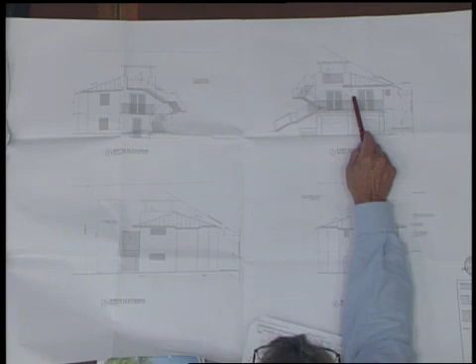I think definitely this plate height needs to be dropped here, particularly as it gets to this side. We've often asked, particularly in the Mesa, folks trying to do these upper stories, where we have a conflict, to get that plate height reduced to 7.6 at the edge. You can still have a vaulted ceiling in an art studio. I'm an artist, I know the need for a nice volume, well-lit space, but I think you can get that ceiling height down. And then by pulling all of that down, you can start to pull this down, and I think that's going to be important.

I think you need to think about whether you really need a window on this side that looks down, even though it's very high. You could get by maybe with a couple little peekaboo windows, as you already pointed out from your diagram, that are actually above eye height.

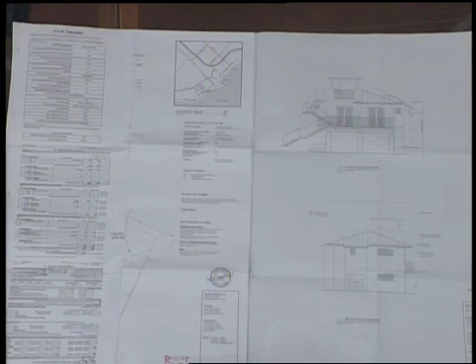And one of the things that always helps, let the scale go. Somewhere there's a scale around here. There, here it is. Scale is... this is the finished floor height, here's a 6-foot person.

So getting that to understand there, I think rethink that window. This window is probably of no consequence, you can't really... that's just really for ventilation. That's looking the other way, too, although you might want to think about on the floor plan even making the effort to put the windows here and here and not there. Yeah, not there, because this is a closet, but again, you've got to make the closet work.

And I think it most definitely has got to get rid of this bamboo, and it's got to have a different species in here, so that there's not this constant issue of trimmed or not trimmed. A while back we had an applicant in here where the whole neighborhood was fighting about whether the person actually cut it or didn't cut it, and it got down to we had a police report. So I don't think we want to get there. So let's think about what that material is.

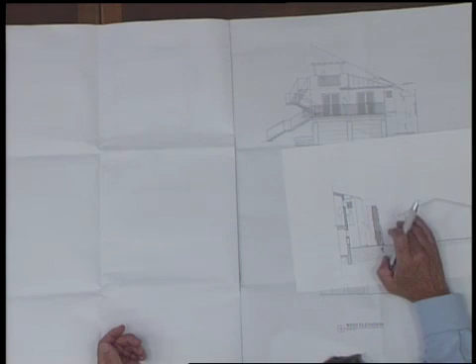I would encourage that to happen, and I also would encourage the owner of this property, as they begin to develop their landscaping, which isn't developed at this point, that they think about what they need to have over here to protect their views, but also to allow sunlight. The reason we have a solar access ordinance is to make sure that sunlight is allowed into adjoining property. That's why that ordinance exists. That's what this line represents. But I think any effort that you can do to get this thing reduced down will go, at least in my mind, in more favor of getting what you want approved.

So those are my comments. Other comments? Okay, if we have no other comments, then the chair would look for a motion.

Mr. Lamone, this says coastal review is required. Does this have to go to somebody else before it comes back to us, or how does that work? In other words, could we give this project design approval, or what is our... Did you check with staff if it qualified as an exclusion or exemption? I think it did, yeah, so it's probably the case. So it's an exclusion, so you can do that.

In theory, we have a couple actions that we can take today. One, we could do comments only and ask the applicant to return with corrective work or whatever might be suggested. We could give it project design approval with comments, which would trigger a 10-day appeal period, or we could give it project design approval without comments, which would also trigger a 10-day appeal period. So I will look to the board to make a motion.

I move to continue the project indefinitely, or 2 weeks. Which one? 2 weeks. I'm not going to guarantee you that. Can't do that. Okay, indefinitely. Whenever he says. We got to go to the full calendar.